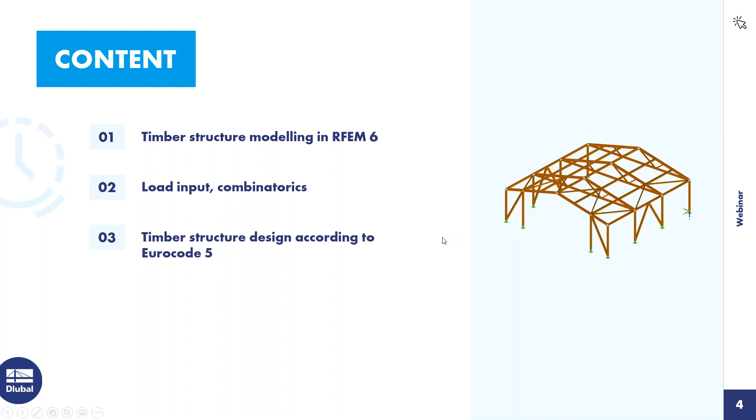You can email your questions to info@dlubal.com. To the agenda today: first point is timber structure modeling in RFEM 6, that will be done by Bastian. Then the second part, load input combinatorics. Then the timber design according to Eurocode 5, and he will document all in the printout report. Then he will hand over the screen to Gerhard and he shows two examples with detailed design, for example modal analysis. Then I hand over the screen to Bastian, just a moment.

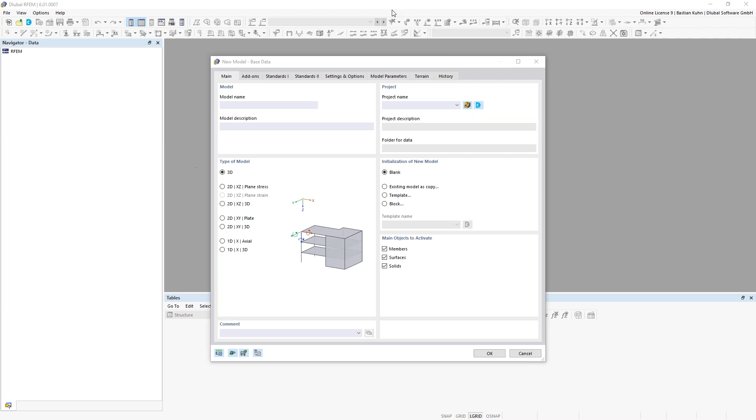All right, so when you start our new software RFEM 6, the program, we just give our model a name, we will call it webinar. Maybe also the date of today, that's 2021.

What's probably the first difference, if you know the RFEM 5 software, we have here the type of models, and there's a 3D model, what you probably all know and what we are dealing with today. But we also have increased the options for the 2D model, and there is this last one here for 2D, XZ, 3D, and also for XY, which means that you can model your structure 2D but design it in 3D. That is, I think, a good point for timber design, especially for timber design, because it's quite often used. That's what we know from our customers. But of course, today we will start with the 3D.

The other points I refer to the already-held webinars for RFEM 6 where this is explained. One of the other big changes compared to RFEM 5 is that we have included all the design add-ons directly into the software, and therefore you have to choose what kind of elements you want to design from the start. For my structure, what I will define here today, it's enough to have the combination wizard, the classification and load wizard, and also the timber design. All the other parts are not part of this webinar today. I think Gerhard will show you also a little bit about structure stability, but I will use the simplified method, which is included into the timber design as well.

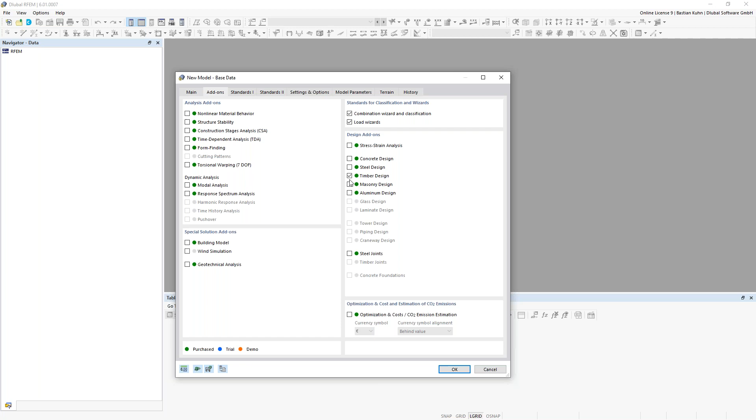Okay, now that I've chosen this add-on, I can directly go to standards and choose the Eurocode 5 here with the timber add-on.

When you choose the standard group timber, this button is active and you can edit the national annexes. For timber, the important point you should take a look at is the deformation coefficient, with which you regard creep into your structure for the serviceability limit design situation. It's divided into service class 1, 2, and 3.

For service class 2, it would be 0.8. For service class 3, it would be 2. As we are designing everything today in service class 1, we can choose 0.6 as a factor.

For the other factors, I will not lose too many words as they are not important. I will do the design according to the German annex for the Eurocode, but of course you have all the annexes for Eurocode listed here, and you can edit them however you want.

One point I forgot: of course, you do not only have to design according to the Eurocode. It's also possible according to the American standard, Canadian standard, Brazil, India, Switzerland, and so on. There are quite a lot of standards available.

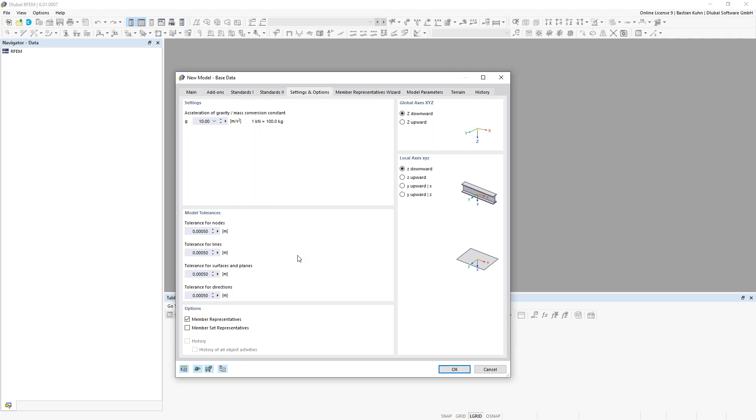When you activate this, another register opens up, and there you can see that you can consider member representatives. I will explain later directly in the software what this means for the practice in the design. Just to give a rough estimation now, you can unify several members into one representative, and the advantage is that you do not have to give design parameters to every member, but just to the representative. So that's a very short explanation of this.

Then the last register in the basics I want to show you is the model parameter, where you can select the location where you want to build your structure. So maybe we will give the explanation with the location of our office here in Leipzig, Neumarkt 1, and press OK.

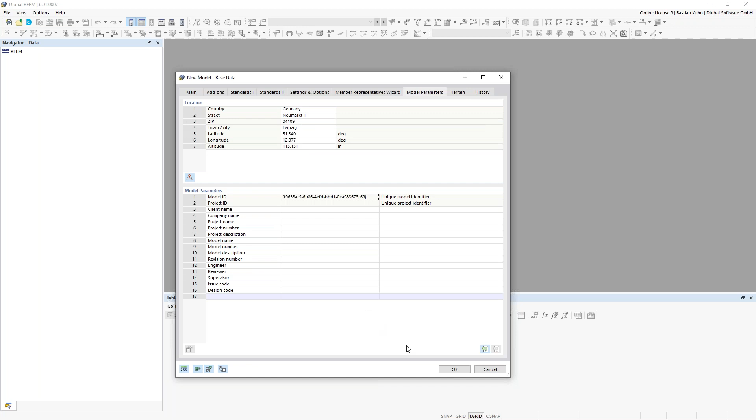Now we have the location, and one of the great advantages of this is that you do not have to take care about snow load, wind load, and earthquake design anymore, because all the relevant information given by the location is already inside the software via this. So that's quite a handy tool to have.

So now we are in the graphic screen of the structure. If you know RFEM 5, you will probably get a feeling for how this works. Right click here, there's the data navigator. We've changed a lot of things, but the view and how you work with it, I hope, is known to users who have been working with our software for a longer time.

Now we want to design a hall, and therefore we define a new member. We have here the member types. At first we will start with a beam member type, and as we want to define a column, we will give the end of it a hinge - here, a moment hinge at the end.

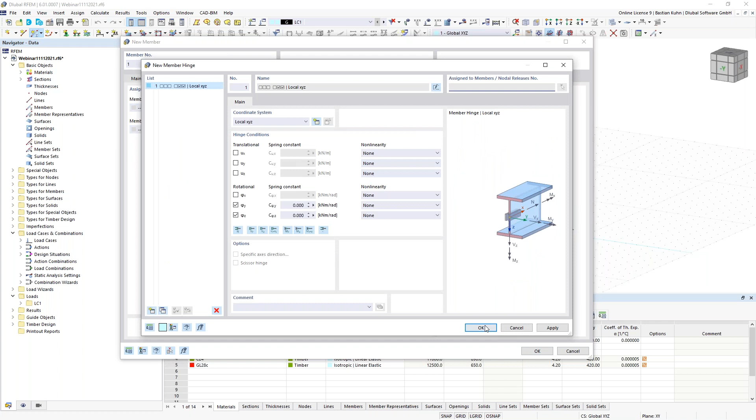Just simple like this. And now there's the second register, section with the distribution type, that has been increased quite a lot with the options you have there. You can design a tapered member, choose the alignment - that's much more user friendly than in RFEM 5, because the alignment and the eccentricity coming from it are calculated automatically. There are also several design types you can choose here.

Anyway, today in this part of the webinar we are concentrating on the uniform distribution type.

And we want to define the section. You see there's already a predefined section of 14 by 28 centimeters, but that's not what we want here, so we go to the library. The library is divided into steel sections on the left side - standardized and parametric sections - and on the right side you see all the sections relevant for concrete or massive design and for timber design.

We are able to design all the sections that you have here under parametric massive 1 in our add-on timber design.

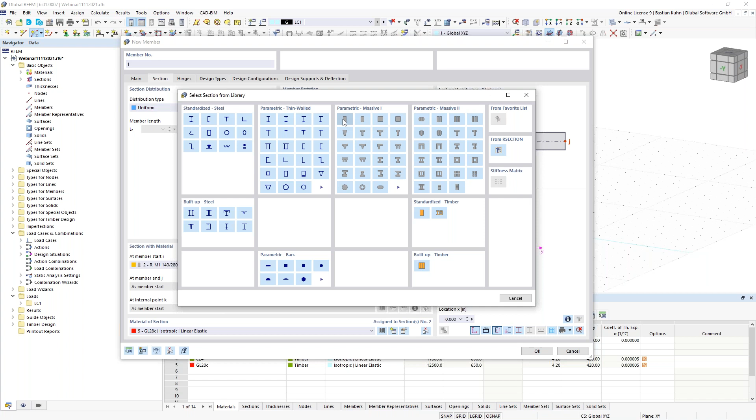Here you see that there's a whole bunch of sections possible, but today we will also concentrate on the massive rectangle sections. It's always opening on the other screen, and we now have the list of sections, and I want to actually have a section 14 by 14 centimeters.

I want to have it isotropic linear elastic from the material model, and if I click onto the library here, I get directly to the material library.

If you're working already with RFEM 5, you probably knew that the material database is maybe a little bit flooded or overloaded, and we really tried to clean that up here. So if you go to Europe, of course all the other countries are possible there as well. Solid timber, you see it's quite a cleaned up view, and not so many materials available anymore, as they were, from our opinion and also the customer's opinion, way too much in RFEM 5, and now it's much easier to get it.

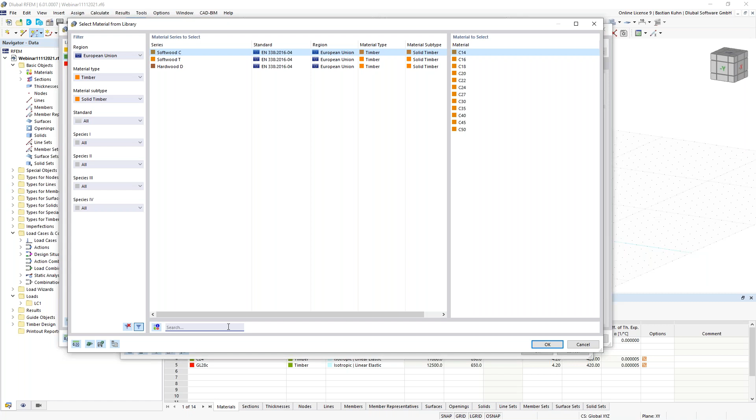But of course you can also use the search function here on the bottom. I'm using a C24 standard material for timber design, 14 by 14.

Sorry, I was a little bit too quick, I think, because when you choose C24 here, you have a register with the material values, and here in timber design you have all the relevant data you would need, the material properties, and also the design parameters for ultimate limit state, fire design, and so on. You can modify them here as well, so if you want to change the burning rate for whatever reason, it's possible to do it in here.

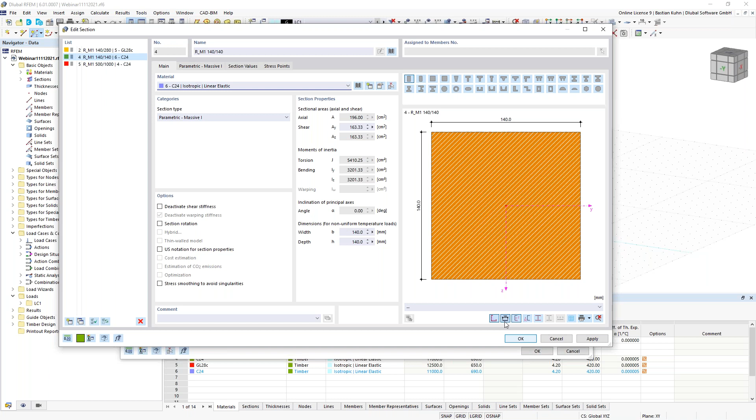Okay, yeah, this is the section. The other points are probably mentioned by Gerhard later on. Okay, and this was the wrong section, I wanted to have the 14 by 14 centimeters.

Okay, these are the first three registers, main, section, and hinges, what I showed you now. And there are also 3 more registers: design types and design configuration. That is one of the big changes in RFEM 6, that now you are defining all the design parameters according to member. It has the great advantage that you can change the design parameters for different members, e.g. a column may have another design parameter than a girder or anything else. But I want to model my structure first, and then I will show you these dialogues and also explain what it does, and also explain the member representatives with this.

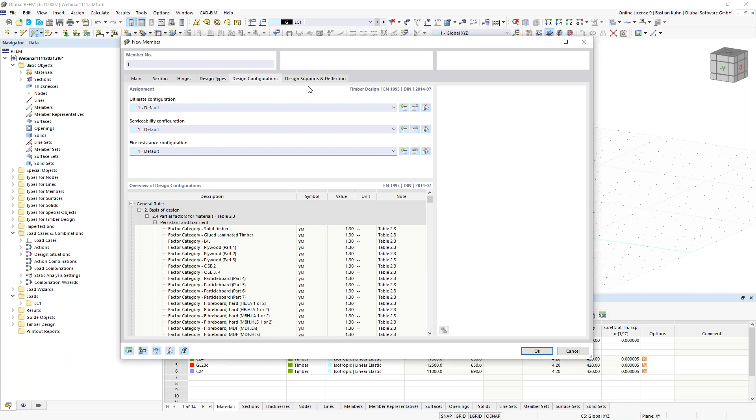So this is now just for your information, and I will model the structure. So the first column will start at its origin and should have a length of 4 meters. You see that if you open this drop-down box here, the representative is already assigned, and it has this little box which shows me that this is a representative.

Then I will give it a support. Now that's a little bit too small, if you want to increase the size a little bit you can do it here. Oh, that's still not that good, I think. Okay, but yeah, maybe we also shouldn't overdo it.

Okay, that is this, and then we will copy that 14 meters... created one copy in X direction, 14 meters. Okay, and there it is.

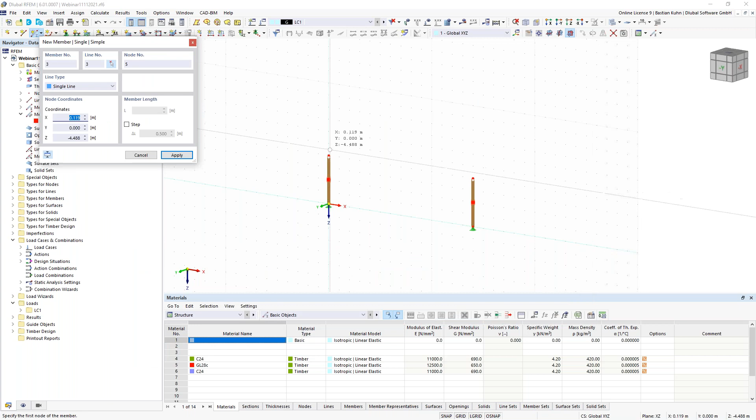And then we will have one of the other girders, and this should have another section here. Actually, I want to have this section, it suits me good, it's 14 by 28 centimeters, and also GL28C is the right material for me. Define it here, and then divide this member by 1 node.

Okay, so we see now that you have 2 member representatives here, and that the column and the girder are already divided by that. So we want to have a roof angle of 13 degrees, that gives me some height kind of this. And here probably one edge I also want to have a hinge, and therefore I'm defining it there as well.

So now we need the bottom girder of the little truss that we are designing, and that will also be, in this case, I'm using a truss type, because all the other elements that I have should actually not be loaded by bending, so I can use the truss type here.

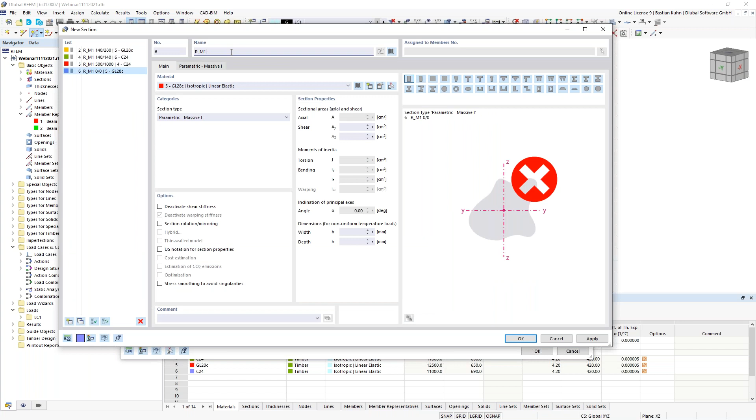And as a section, I have to define a new one, and this will be, let me look, 14 centimeters by 26 centimeters. And of course, in this size, I'm also using GL28C.

Yeah, okay, the other points I will mention later on, and define this here. So, now I have the third representative in here. This member here, I'm now also dividing.

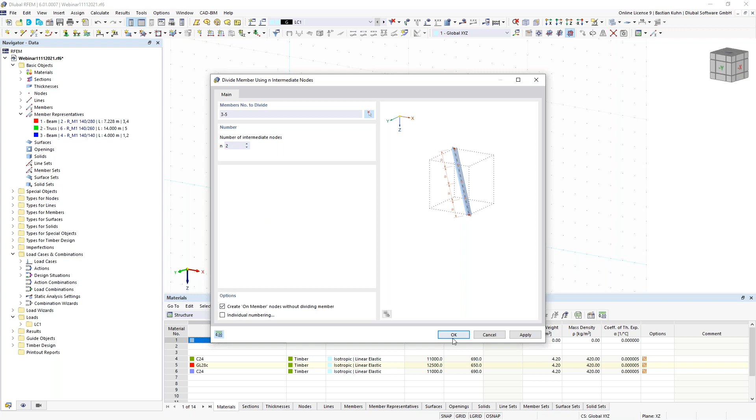By intermediate nodes, but there is a good new feature that we have here. On the bottom under options, you have the option to create member nodes without dividing the member. So if I choose now 2 intermediate nodes and press OK, you see the beam still has its original length.

Of 14 meters, but I have here intermediate nodes that are not dividing my structure. This is also one of the advantages in RFEM 6 compared to RFEM 5, that we do not have to divide the members so often, and then the options with sets of members are maybe not really needed so often. They are still probably needed for serviceability limit design and so on, but not as often as we had it in RFEM 5.

Okay, now I will define the intermediate sections or members. They can also be a truss type. Actually, now everything I'm doing is defining truss types. Define a new section here, and that should be 120 by 120. And then of course I can use the C24. I choose this material here, say okay, okay, okay, and define it here.

One way this, and now it's probably very obvious what the representative does, because now it's clear that left and right side are similar, and you see that they are unified here under this representative. Okay, one more time, and now it should be ready.

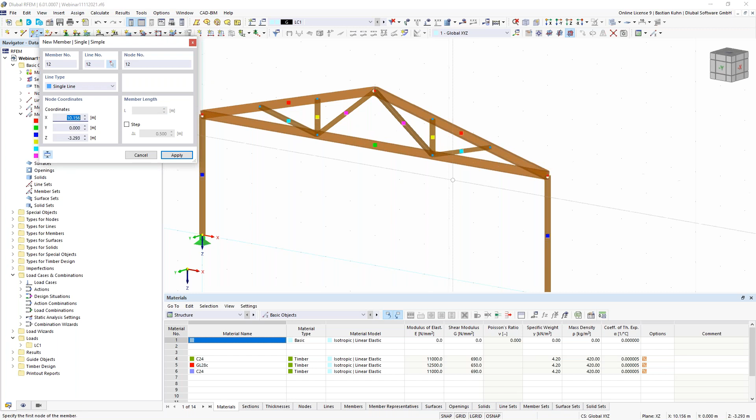Yes, that works. This structure I can now maybe load for the self-weight and the roof setup in the first load case, because it's quite simple here. The first load case is already assigned, so I choose here 2 kilonewton per meter. Load direction ZL is fine to me. Say here or here, okay. And now I have it there.

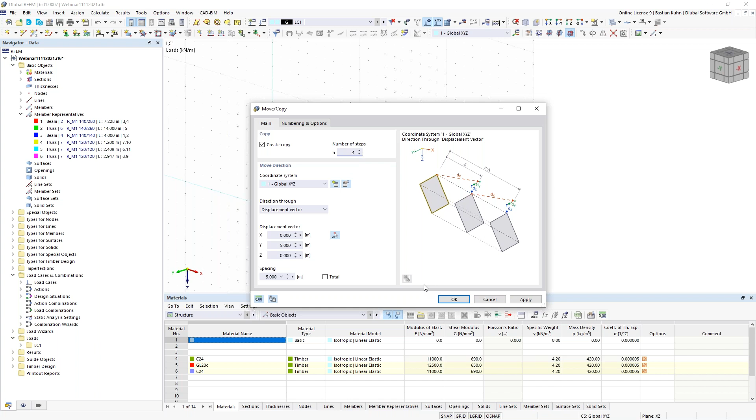Now the last thing I need to do for my hall is to copy this again, but now in Y direction, not for four times, but for 5 meters in Y direction, and here 4 times. Now if you activate under numbering and options the link steps, you can also directly connect all the related parts to each other.

Therefore, we will also define another member. This can also be a truss type, and the section probably it's enough to do 12 by 12, but maybe just to be sure we take 14 by 14. It's okay, 14 by 14, C24 can stay, so that's okay, and okay again.

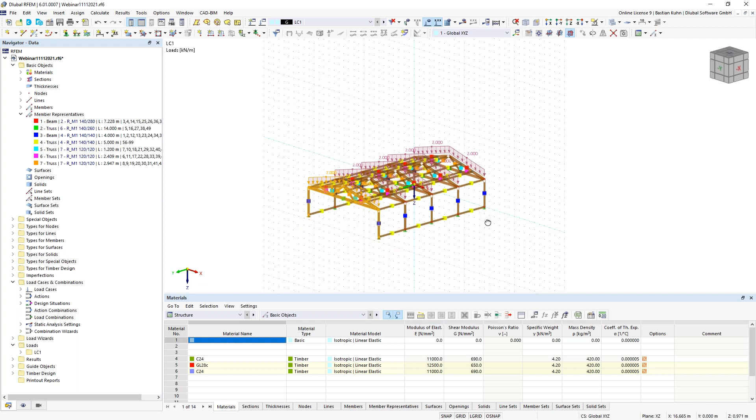And now we have it. Also the load is here. Now the beams on the bottom probably make not so much sense, so I'm switching off the member representative, and now I can just simply delete the one at the bottom. If I go into the other direction, also the one right here, I will also delete. I can delete the lines actually, because this deletes the members as well.

Lines and delete. All right. Perfect, so that looks quite good to me. That's a truss. Okay, now I know I forgot one thing: the load here on the side should be the half of the one that we have in the middle of the field. So that is easy, because 2 divided by 2 is 1.

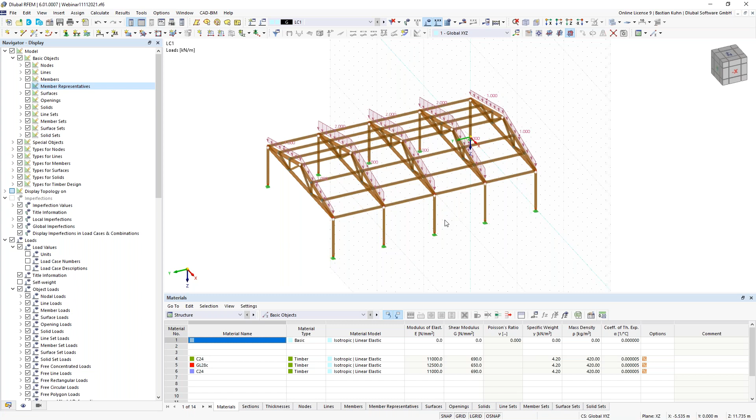And now we have it right here, and this hall is now still kinematic, pretty obvious to everybody. Now we need to define there also stiffening elements. I choose to define my stiffening elements near the middle of the structure, because it makes the most sense to me. Once again, divide the member by 1 node and without dividing the member, and define the section there.

And I'm once again choosing the truss and the section 14 by 14. Okay. Here as well. And here. So now the walls are stiffened out into the Y direction.

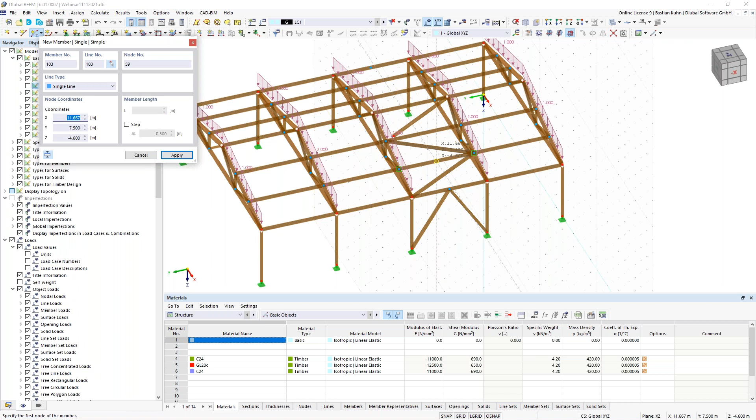I will do the same for the roof. So come on, this and this, and this and this. Oh, that was wrong, I saw it already. Okay, I'll get out of the dialog and grab it here and move it to this node. Maybe switch on the representatives just to see it again, and for me it's a good help to have it.

I will just do one side of the structure, and I also will stiffen out the front of it.

I will delete this here, because I want a complete fixed wall inside. Now we cannot have the representative, that makes no sense. So we do it this way instead, copy it here, and then we have it. And if we fix that to the bottom, it's there. And here, once again, the last cross section.

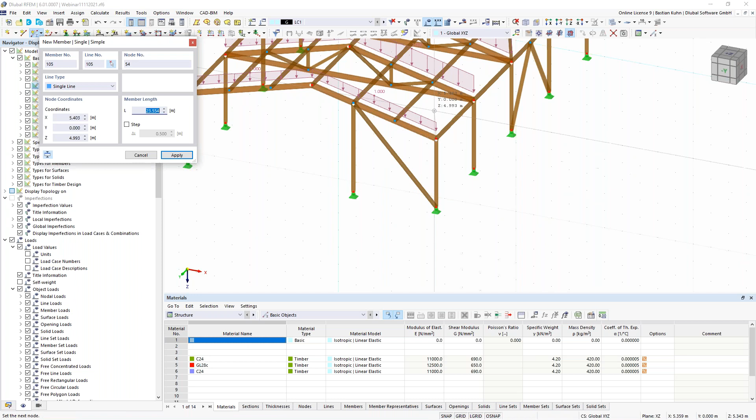14, okay. And for my roof, I will also give some stiffening elements right here, here, and here. Okay, quite a lot of drag and drop or modeling, but I promise that's it.

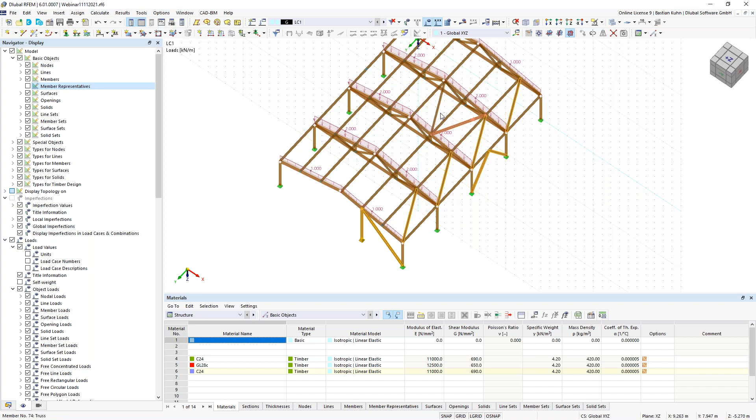So then we copy, or we mirror it to the other side. This, and this, and now we mirror it, we create a copy, and we use the YZ plane and copy it directly at the ridge. All right, so now it's there.

We can make a little test and save it directly in this folder before we run the loading for snow and wind. That's what's missing already, but that looks quite good. And so we have a load, and 9.7 millimeter deformation looks also quite reasonable.

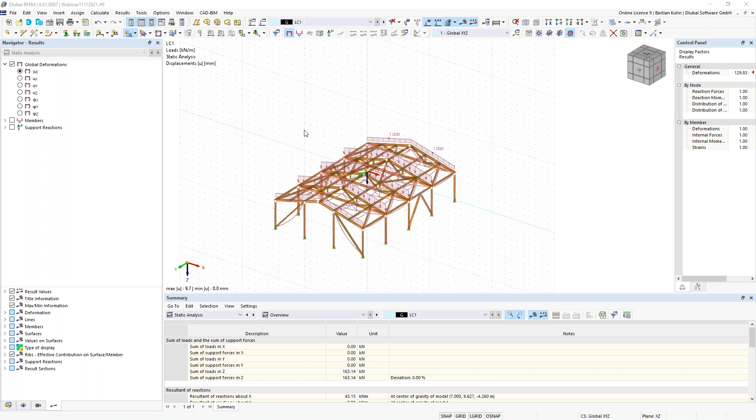Now one of the other great features we have in RFEM 6 compared to RFEM 5 is the so-called surface type load transfer. So when you define a new surface here, press OK and define it, I will explain the register right away. Even though it does delete the result, you do not have to worry. This surface type only distributes loads. It does nothing else, it gives no stiffness to your structure or anything. So it's only distributing the load into its plane area to the edges. That's what I want to achieve here.

Now I want to explain the register. If you double click onto the surface again and go to load transfer, you have an option to say remove influence parallel to members. In this case I only want to distribute the load, similar to what I did with the self weight, to the main member or main beam here. So we will use this one and this one, and this one — actually I was probably on the other side, but I think it shouldn't matter, just to be sure I will use them again. Okay, and yeah, I was on the other side.

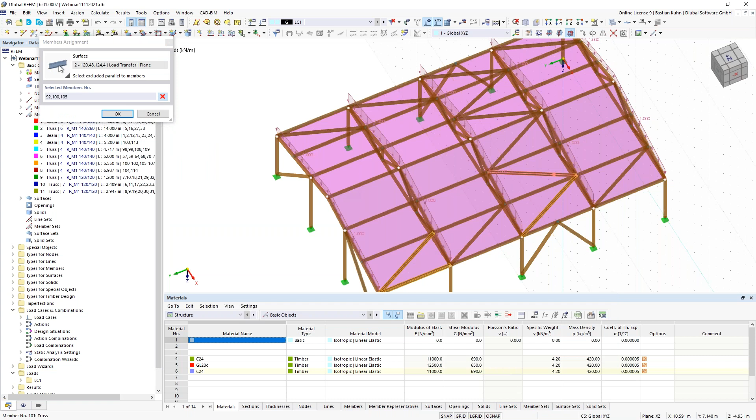But then I can do it here similarly and select it here, here, and here. Press OK, and now I have defined the distribution, and I want to show you in the snow load generator what kind of effect this has.

I already said that if you know RFEM 5, the work is quite similar to RFEM 6, but one thing that's been increased enormously in options is the columns here on the bottom. That's what I want to show you here.

The load wizard is now also integrated into the column. If I go to snow load in here and double click, I can choose the dual pitch roof, then choose the nodes of the roof. You can choose the roof side, and the parameters you can control.

You see it's already assigned all the relevant parameters: the height, where my building is located, the load zone, and so on. The load cases I need to define for this webinar today — I'll just show the load case full snow load, not the half snow load on the left and half snow load on the right side. I think that's enough, and for this kind of structure we're defining here, I think any engineer designing a structure with a dual pitch roof will mainly use this, or it's mostly the design-giving roof.

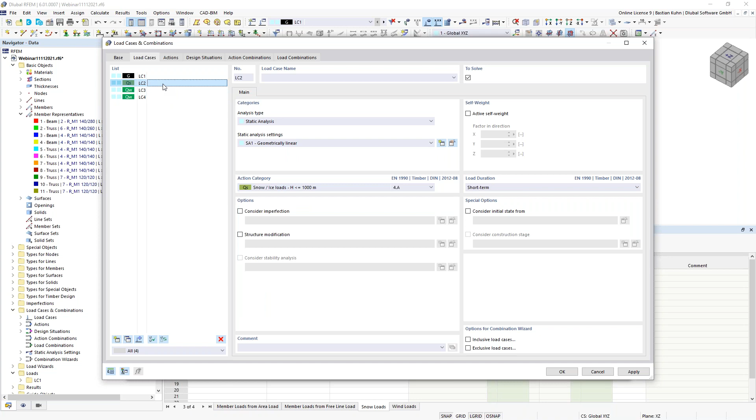I will define 3 load cases more: one for the snow load we're using right now, and 2 more for the wind loads, since we want to define them as well. So now it's choosing load case 2, and if we select OK and jump to load case 2, we see the envelope of the load generated here.

And if we go to surfaces and display load separately, you can see that because of my load distribution surface that I have defined, the load is correctly transferred to the main girders of the structure.

Okay, one more time we do the same for the wind load. There we will just choose the dual pitch roof with the roof corners. Here, select the points once again.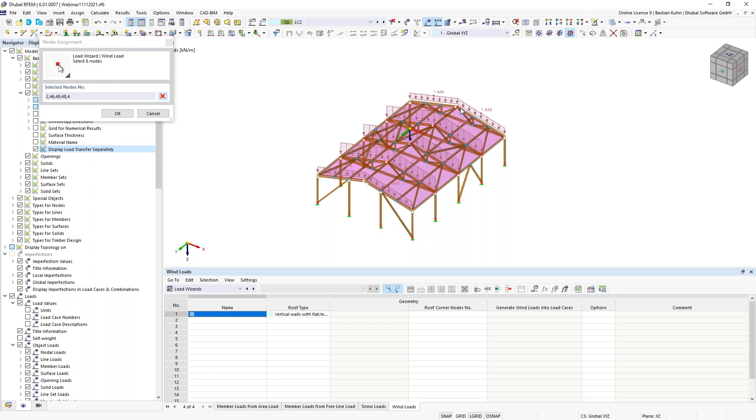No, there and there. I would just define 2 directions: 0 degree and 90 degree. I hope that's right. Yeah, I think so. Here I have to define my structure height, which is 5.8 meters.

All the other parameters are taken over from the first input. For the webinar, I will just use the uplifting wind loads and not the wind pressure loads. So, now when we look at this,

here at load case 3, that looks quite good, I think. And in load case 4 as well, maybe we should also display that separately just to check it, but it looks reasonable to me. And here you can see the wind load zones as well.

Okay, so the structure is done, and now we will concentrate on the modeling, or on the load combination. Sorry, that was a little bit too quick. Here you can define what kind of load cases and combinations you want to assign and calculate.

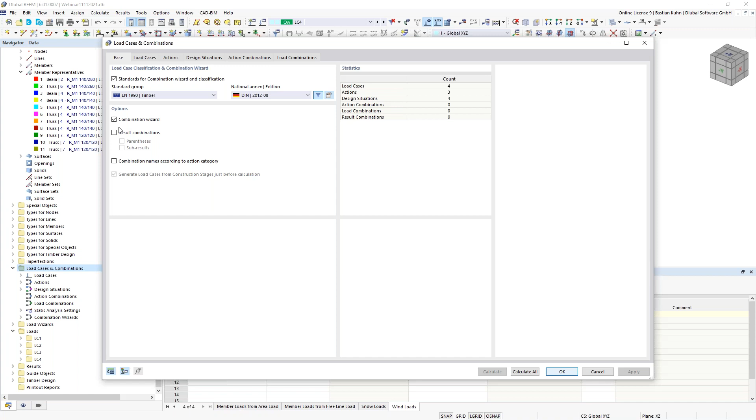I have the combination wizard activated in case you want to make your own definitions of load combinations. You just have to deactivate that. For our purposes here, we will use it.

The design situation we want to verify is ultimate limit state and 3 types for serviceability limit state. And I also want to do fire resistance verification. For this, I will define an accidental combination.

Here in the info box, you can always see what the software is doing with it. So you see here the creeping factor that I introduced at the start in the basic data, where it is located and where it is used in the software.

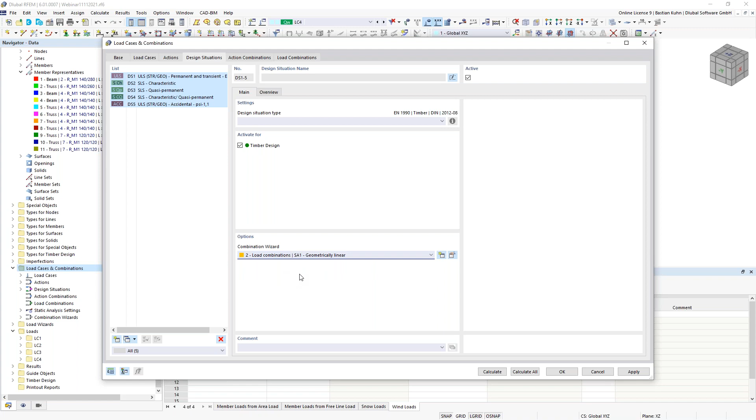I already checked if a design according to second order theory is necessary. It is not, and therefore I can say the load combination can be generated geometrically linear.

Okay, so now that's done, but I forgot one thing—or not forgot, but I mentioned it—that we need to define the design parameters before we are designing the structure. And now we have the representatives here.

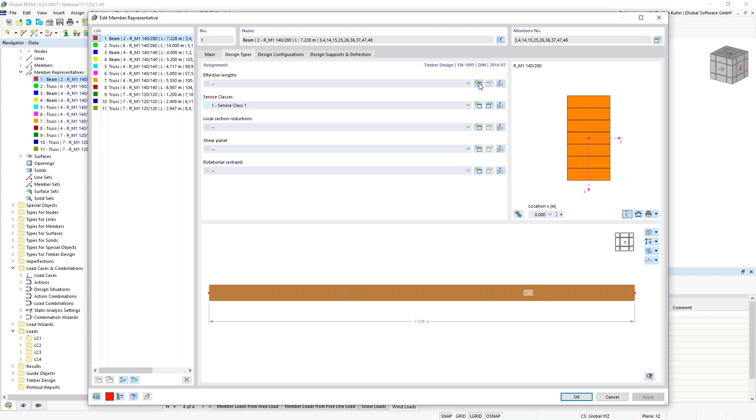So, the first representative we can activate is for the top girder. That's probably the representative we need to look at the most regarding stability problematics. And if you go here to design types, effective lengths, you can consider the effective lengths for buckling

and for lateral torsional buckling. We are also able to verify such elements via an eigenvalue method, but this is going to be shown by Gerhard in just a few minutes when I finish my side of the presentation.

And yeah, therefore I will just concentrate on buckling and lateral torsional buckling with the equivalent member method. That's what I'm doing here. And I'm actually switching to absolute values because I know the hall has a width of 14 meters, and half of it is 7 meters.

So I say for the strong axis, I can use this one, and for buckling in the weak axis and lateral torsional buckling, I can choose the distances of my stiffening elements that I defined, which are at a value of 2.58 meters.

Say, okay, service class is 1, that's okay. Local section reductions, in case you have any kind of plumbing or electricity cutting your structure, you can also define it here and decrease the strength of it.

A shear panel and a rotational restraint are more or less mainly for the eigenvalue method that is going to be shown to you by Gerhard.

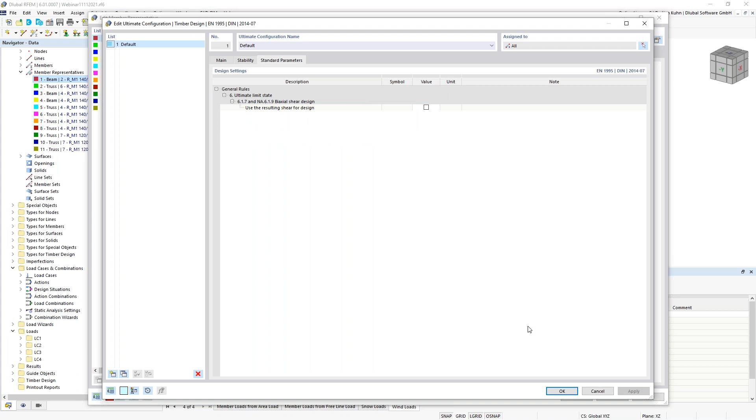but this is not relevant now for us. And the shear design is, I think, also not relevant in this case. Okay, serviceability for the top girder is not relevant because when I'm verifying the deformation in the bottom girder, it's more than enough, so I can switch that off.

And fire resistance as well. I will get to that point when I take a look at the other elements. And that's right now, because the bottom girder is probably exposed to fire, and I want to expose it to fire by a ratio of 30 minutes. So 3 sides of the structure are exposed to fire, and that's enough for me.

Serviceability is also relevant for the bottom girder. Of course, that's the most important information for this bottom girder, I think, how much it is deforming. The limit values you can edit here. That's similar to what you can do in RFEM 5.

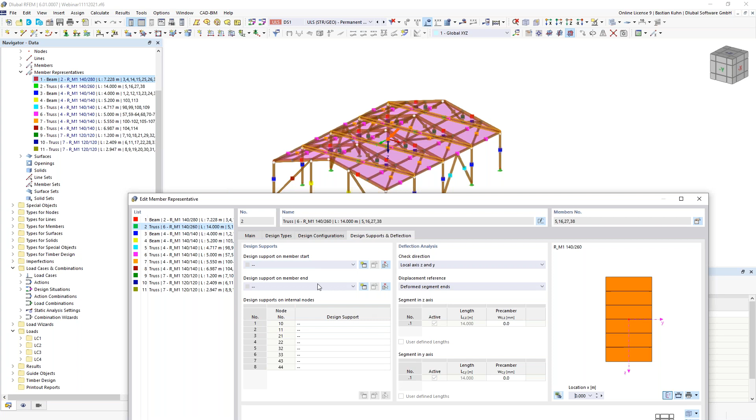And design supports and deflection, I will also leave the default values. But here you can say if you want to have design supports in it, and also say for the deflection analysis in which direction you want to assign that. I think it's also going to be shown by Gerhard to you later on.

Buckling, of course, also for the bottom girder, this is probably relevant, but maybe not. Well, we could also do it for lateral torsional buckling, but as the load is introduced at the top of the top girder, it's maybe not so relevant in here.

And here as well, also for the buckling, we can try to design a little bit more efficiently and say it's held in the weaker axis by the stiffening elements, and for the other direction I can choose the whole length of the beam, which is of course 14 meters.

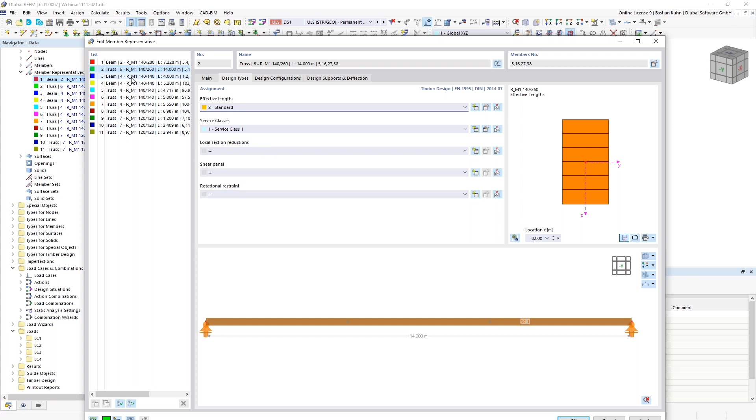So I have this here, service class there as well. All the other elements that I have in here are all just stiffening elements. I can actually select them all and say for effective lengths, okay, I'm just verifying buckling, because mainly I'm actually looking for the columns in here, and I will also leave the principal axis by a factor of 1.

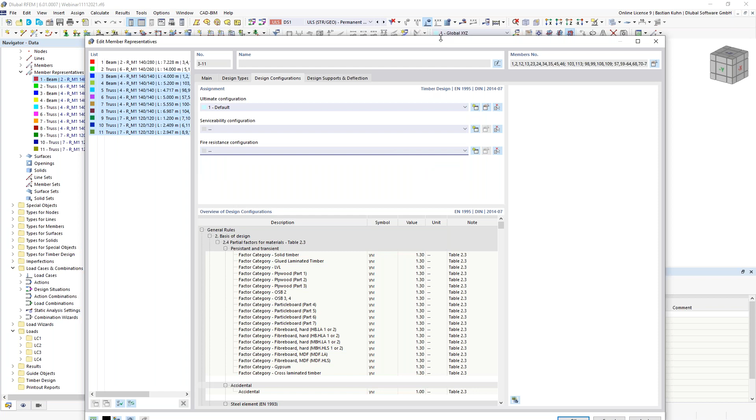Design configurations, I want to have ultimate limit state. Of course, serviceability makes absolutely no sense for the other elements. Fire resistance, yeah, of course, for the columns that would make sense, but for all other elements not, so I'm skipping it for this presentation. Press OK, and now my input is actually ready.

I can directly design the structure, and for this you go to the columns again, to the timber design, where the former add-on Timber Pro is included. And here you can say, choose what you want to design.

Of course, I have my ultimate limit state, serviceability, and also the fire resistance combination, and I want to verify them all. I can check what kind of objects I want to design in this structure, all material configurations and so on.

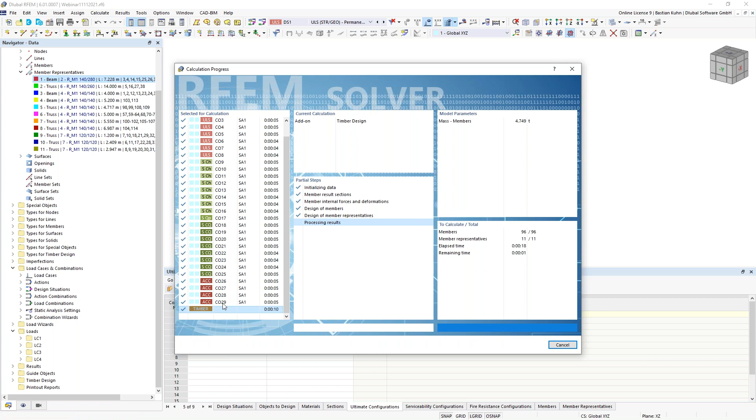Now when you start the calculation, one thing I wanted to show you is that with RFEM 6 we have the option to parallelize the whole combination. So each combination—if you look at RFEM 5, the calculation was done so combination 1 was calculated, then combination 2, and so on—here all 29 combinations are done at the same time. So the speed up process for a lot of combinations should be quite good or big.

So you see here, hooray, we have a loading of 100%. Every engineer loves to see this, I think. Well, 100% is still red, but I think 100% is a good value to have. That's what we can see here in the overview, and here in the design ratios on members you see that we have this loading here.

And here again, the representatives are a good tool to check the calculations that you did. So when you activate the top girder and say, okay, please show me only the selected objects, I can now take a look at the top girder. And of course, design governing for this, as we all expected probably, is the stability analysis with lateral torsional buckling according to 6.3.3 in Eurocode 5.

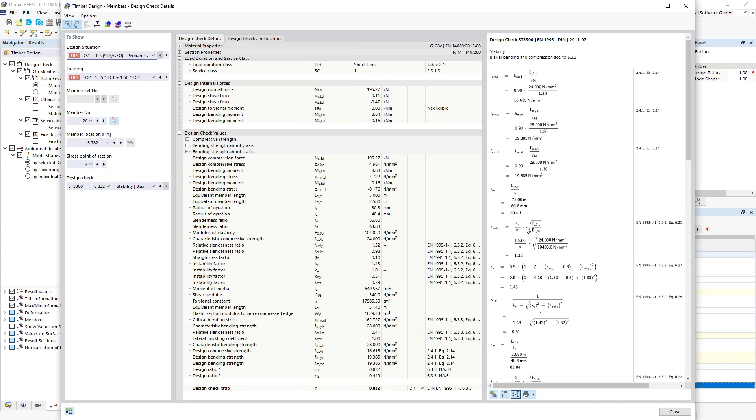And if you go to the detail mask in here, you can look at the design check details, and you have all the values written as a very nice equation related also to the equations from the standard, so you can directly vice versa look into the standard and verify all these points. This is probably something you want to have in your printout report, so there we are directly printing it to this.

I will not show you the whole printout report again, because I only want to show the parts relevant for timber design. Maybe I don't want all points in it, but global settings, design situation, materials, yeah, we can have them. Sections and ultimate limit configurations make not so much sense, I'll show that in the protocol directly. Fire resistance makes sense with the settings, and in the results I'll probably just have the design ratio by design situation and by section, but only verifications over 60%. Everything else doesn't make much sense to me.

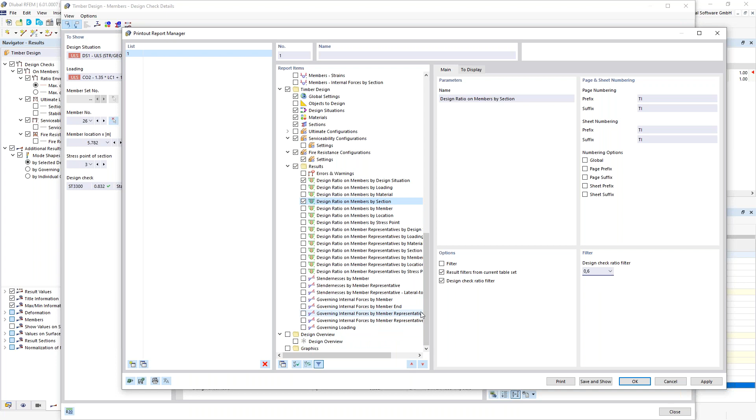So then I say okay, and on the other screen it shows that the printout was successfully generated, which is good.

Here you have all the results and verifications into your structure, and design ratio by section is probably something quite interesting. If we go for the representative again and switch that on, you see it here. So buckling is still a problem for the bottom girder, or well, it's design-governing. And for the columns, you see there's potential to save a little wood and money by decreasing the size. But you also need to look at the connections, so 70% isn't bad to have there.

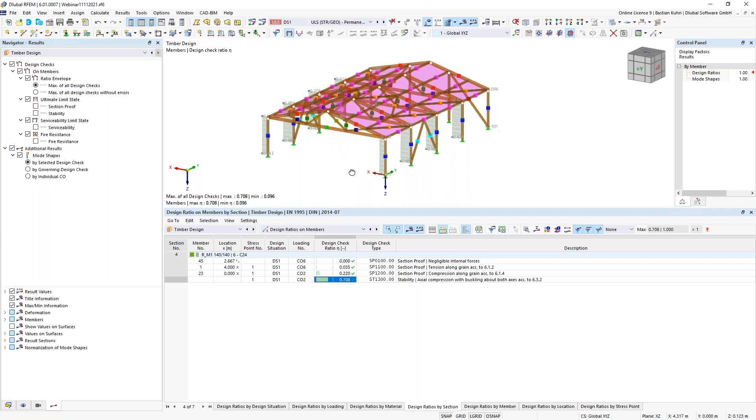A picture like this, for example, maybe isn't the nicest. Well, why not? If you want to look at the columns, let's say no, we'll do it the other way. Hold on.

This is representative, so then we make selected and related objects. This is maybe something good to have in the printout report, or in the results we use the static analysis result, and maybe also the internal forces for normal forces, which is quite interesting.

This design situation is the envelope of all the combinations for ultimate limit state that I have here, similar to the result combination we had in RFEM 5. So I print that to the protocol and open it directly with this.

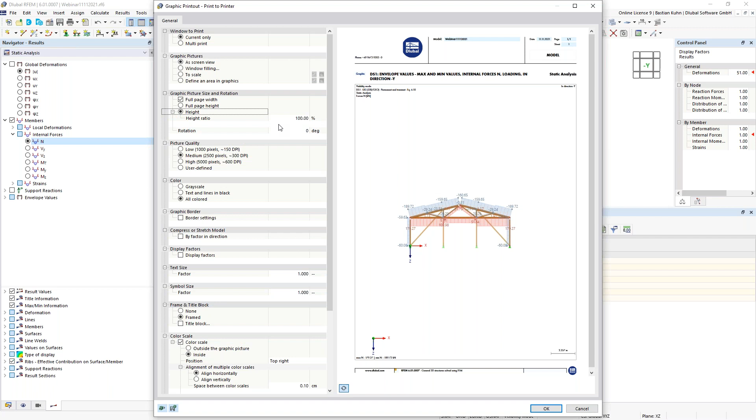Yeah, maybe not the full height, and then I'll directly hand over to Gerhard. For height, let's say, I don't know, we take 50%. Actually, we should have left it this way. Okay, anyway, we print it there.

Oh no, sorry, that was my fault, I did not open the protocol but printed it directly. Okay, sorry, but I can open it now right here. I think it's also opening on the other screen. Yeah, that's for sure. Oh no, there it is. Sorry. Okay, then you have the printout report here with the content.

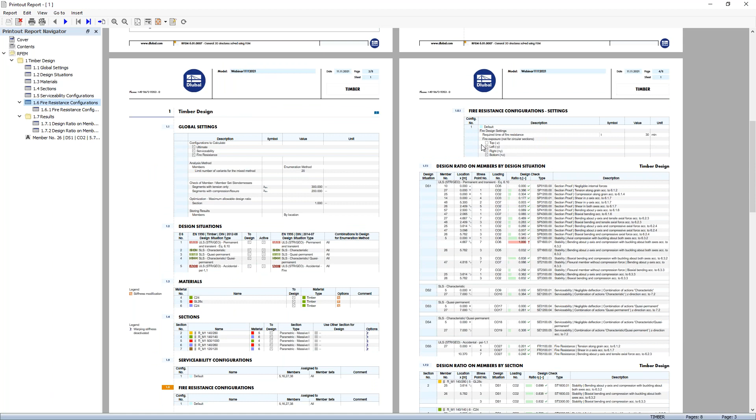You see there's a new fresh style in it, with a lot of options possible. Long-standing wishes are included here, unifying PDFs, including other PDFs, other documents, and so on. That's all possible. Related to the timber points, here you have the verification I mentioned, the design ratios, and the configurations for fire resistance, including that it's exposed on 3 sides and so on. So that's all included here.

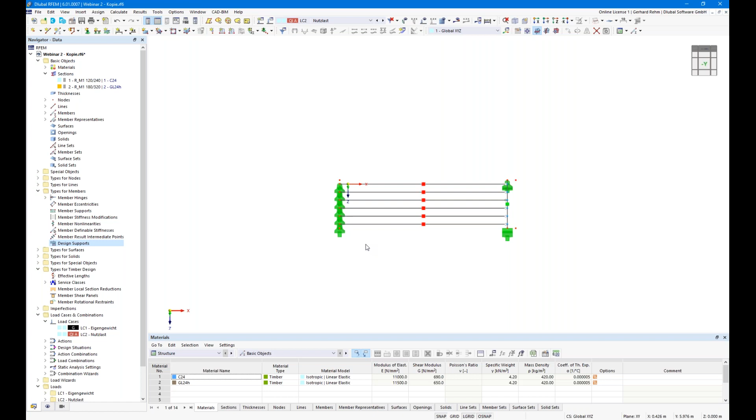So I have 2 examples to show you a few new features in RFEM 6 related to timber design. The first is a topic missing in RFEM 5, and in RFEM 6 we're proud to offer this feature. It's about compression design, when stresses are perpendicular to the grain, which was always missing in RFEM 5, and it's an important feature. We've started implementing it, and it's finished for general cases, but in more complex structures, for example when a lot of beams meet at one node, it's quite tricky, and we need to find a solution to know where the beam is supported and where the bearing area is.

But I'll show you this feature on this floor. It's a floor with a few beams supported on a downstand beam, so there is no rigid support here along this downstand beam, of course, so we have a semi-rigid support for these beams. Okay, so let's start with the beams.

I will show you how to do it. So here on top you will find this tab, Design Supports and Deflection. This tab controls the design supports and also the deflection checks.

We know about Timber Pro, for example, in RFEM 5. There you had to manually define this reference length for the deflection check. And this is done here in this right column.

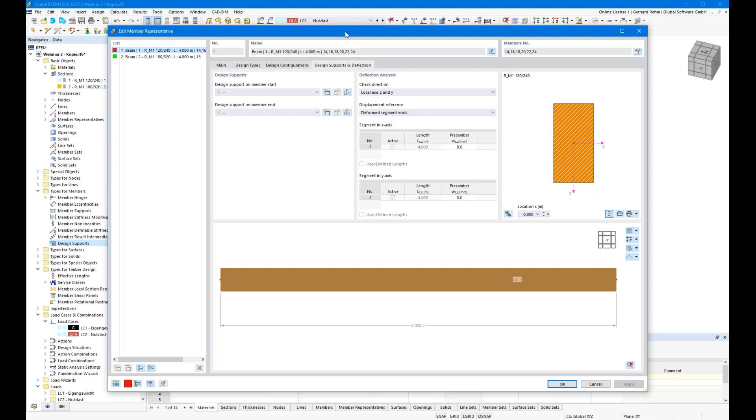So let's start with the design supports. First you can think about why is it related to a member and not to a support. Of course a lot of people expect that this compression design is related to supports, but we have situations where a member end is not supported on a support, but on another beam, for example.

And therefore it's a property of the member and not of the support. So we have member start, member end, or member set start, member set end, and here we can define this support. So we create new, and here we will find the settings for timber.

So we have, of course, in contact area, which we need to define. We say it's a direct support, and the support length, for example, in this case, it's 60 millimeters. It's supported on the positive side, so on the plus z axis. It's an edge support and not an inner support. And this KC 90 factor, which is mentioned in the Eurocode, needs to be entered here.

So we use 1.5 for C24 in this example. Let's name it directly by C24 and 60 millimeter. Then on the right side, we create another one, so it's C24-2 and the beam is 180 millimeter. I will switch this to 180 millimeters and to 1.52.

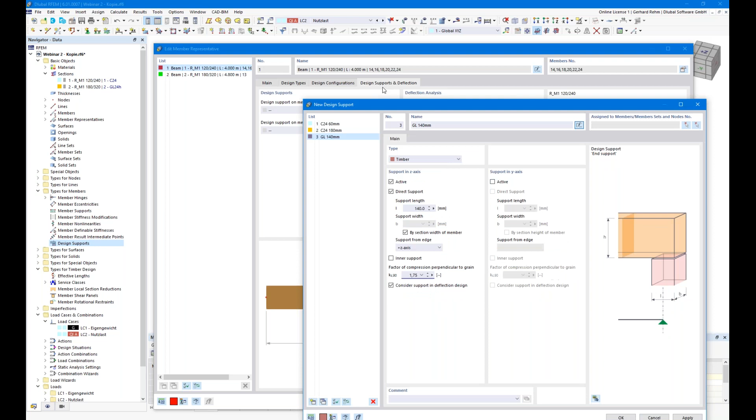And of course the beams are supported on top side, therefore we need another one. In this case it's 140 millimeters, and it's on the minus z axis. It's an inner support, and factor is 1.75.

So I assign the support number 1 on the left side of the beams and support number 2 on the right side of the beams. When you watch this, you see the edge is missing because we are always relating to the statical axis. In case you really want to have it, I can show you afterwards by members how to extend this graphically if needed.

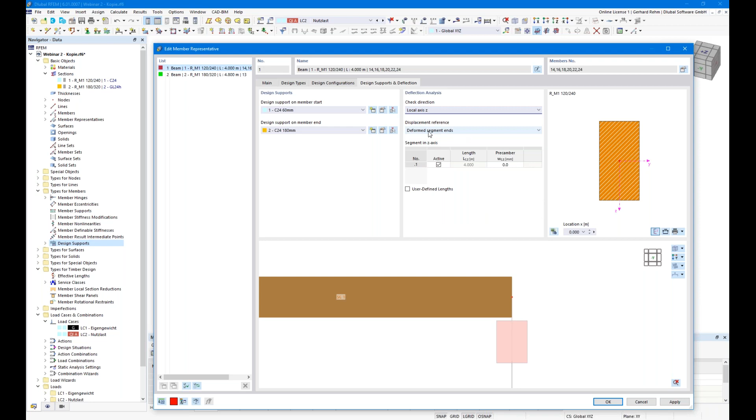To be honest, I don't need it, but maybe for some graphical output you can extend it to the end of this design support. Okay, so that's it actually. The deflection check should be in z direction and to the deformed segment ends, so we consider also the deformation of this downstand beam here. And that's it actually for the beams.

All right, and now let's go to the downstand beam here, to the glulam beam. We go here to this tab again, design supports and deflection. So here you see on the left side, I have this support number 3 with 140 millimeters.

Let's go back to this topic to extend the member. So here on the main tab, there is a new option called end modifications, and for these end modifications you can extend these members graphically only. So it has no influence on the stiffness, on loads and so on, it's just graphically.

This is possible, but I will switch it off, I don't need it. Now let's check this one. We have these intermediate nodes, and of course the load comes from top, so we need to check the support pressure also from top side.

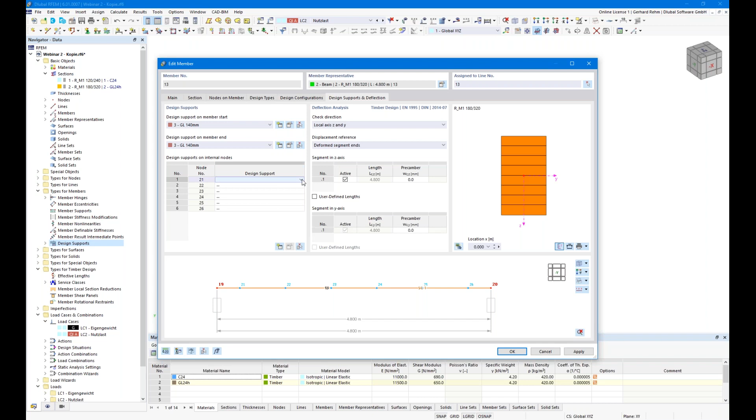So I will assign number 4 for the top, and I hit the F8 button to overtake the column or the cell from above. We check z direction again, and as you can see here, we have a lot of segments now because of this.

That means the deflection check would now check the deformation between these nodes. Of course, this is not the wished behavior - I want to check from node 19 to 20. In this case, just go back to this design support and deactivate this option: consider support in deflection design.

When you do this, you will realize we get one segment again. So in case you have no real support, for example an indirect support like a dovetail connection or some other steel connection, you can simply leave it empty here, or deactivate this option, direct support, and then there is no compression design check. You see, when I deactivate it, all this information is not necessary.

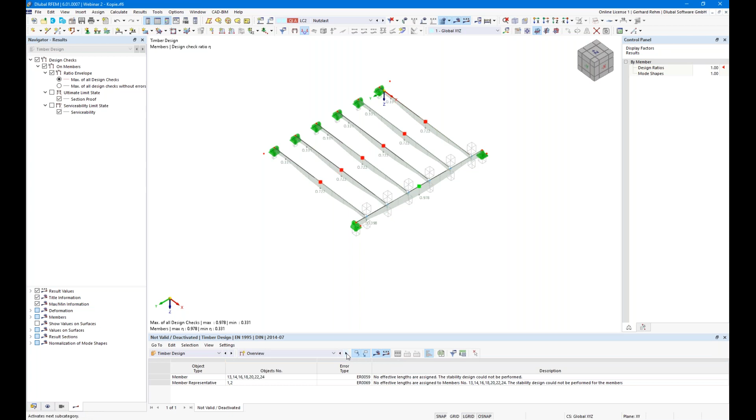All right, so that's it so far. Let's go to the results. We see a ratio here close to 100%. There are a few warning messages because I have not assigned any effective lengths, but I don't care about that - stability is not controlling here. I just check my stuff per member representatives, and go to this tab here.

Then we see the results of the beams on top and of the glulam beam. There are a lot of SLS design checks, so I'm not interested in all of this, therefore I say please show me only the governing serviceability check. Then it reduces all the lines to 4: the check for support pressure, shear, bending, and serviceability. This reduces everything a lot.

Okay, let's check one of them, the compression perpendicular to the grain check. What's happening? Of course we get our support forces - it's 10.5 kilonewton. We calculate this effective area. In this case we have 60 millimeters, and we can add this 30 millimeters because of the effect where the grains hook in. And if the member is not really 30 millimeters long, then this is checked also.

In this case it's 60 plus 30 millimeters equals 90 millimeters, and the width of the beam is 120 millimeters, giving us this effective area. The KC90 factor is considered - actually it's not a big deal, but the problem was always in RFEM 5 that we had no support width, and that was the reason it was always missing.

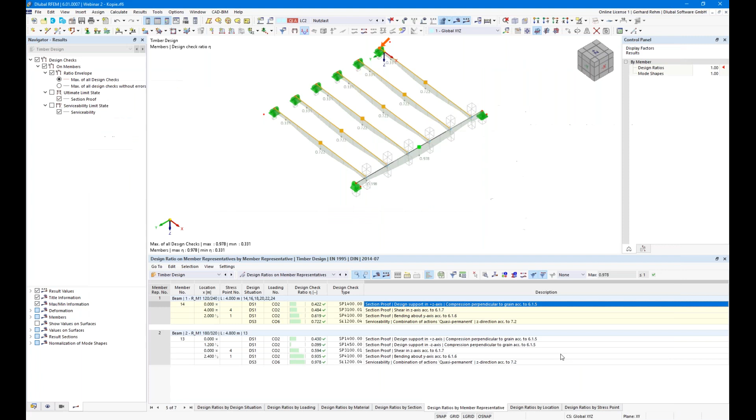Okay, so this was this part, and let's also check only the serviceability. We see the ratio is affine to the deformation, and that's actually what I expect. Okay, so far to this feature, and then let's go to the another one.

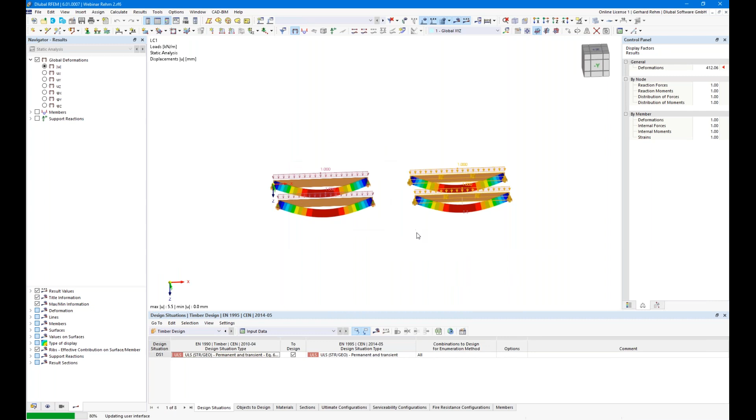Seems it was the wrong one now, but it does not matter - I can just go back to the state where I want to start. I delete this and this. Okay, and I will remove all effective lengths, and then we can directly start.

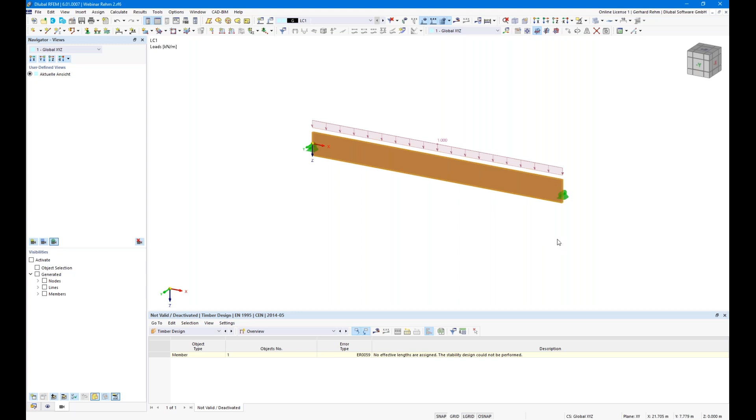Okay, so what do we have here? We have just a simple one span beam, supported on both sides. We have a load on top, and let's check the length - it's 18 meters, and the cross section is 14 centimeters by 160 centimeters. Because of this situation, the beam is forced to buckle out of the plane due to lateral torsional buckling, and this of course we need to check.

I have run the analysis again already, and you see this error message again: no effective lengths are assigned, the stability design could not be performed. This behavior was changed in RFEM 6, because in RFEM 5 there was always a default effective length with a factor of 1.0 multiplied by the member or member set lengths. In that case there was always the problem that a lot of users didn't assign any factor or the correct factor. Now, whenever there's no effective length, you get this warning message that you forgot to assign any effective lengths. That's the reason we get only shear and bending design and no stability design.

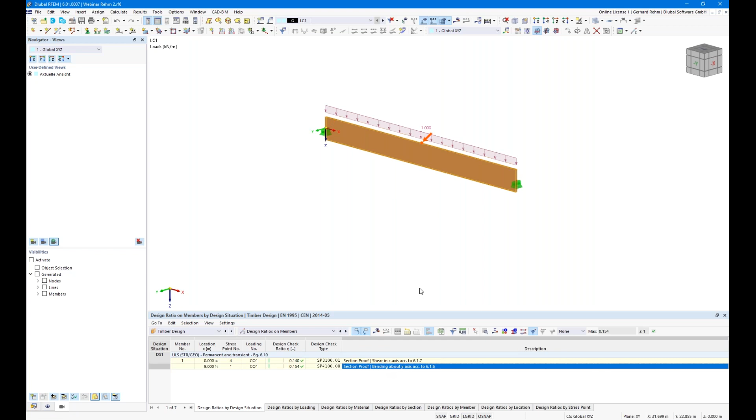Okay, then let's define an effective length for this one span beam. We can deactivate flexural buckling since I have no normal force in the beam. Let's go to this factor here on the bottom - this is the factor where we have to modify our effective lengths.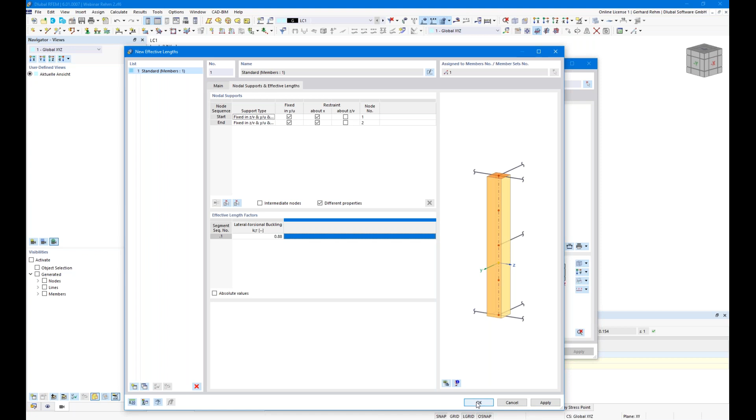According to Eurocode 5, the factor for this parabolic moment distribution is 0.9. There is a more exact approach in the German annex, and the factor here is 0.885. I show you this factor now and not the 0.9 because the result is more close to the eigenvalue result that I'll show you afterwards.

Okay, so let's do this. Click OK, and you see already directly that this design support, or this support for the effective length, is also considered here in the main model. You can activate it or deactivate it. It depends on you.

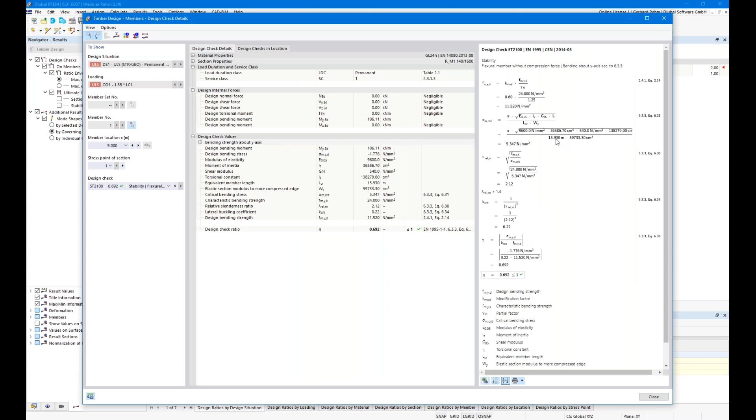Okay, let's run the analysis. We see we get a ratio, compared to the cross-section check, from 15% to nearly 70%. So what we can see is the critical stress, which is determined by the effective length. It was 0.885 multiplied by this 18 meters, equals 15.93 meters, and we get this critical stress here.

So when we divide this critical stress, 5.347, divided by our current stress, 1.776, we get a critical or load factor of 3.01. So maybe we can remember this factor, 301.

And this is the typical solution that you would use in RFEM 5 or by hand calculation. But the question is always what happens in case of more complex structures, more complex supports, maybe intermediate supports, supports on top flange, bottom flange, and so on, curved beams, tapered beams, and so on. I will show you our second solution for this issue.

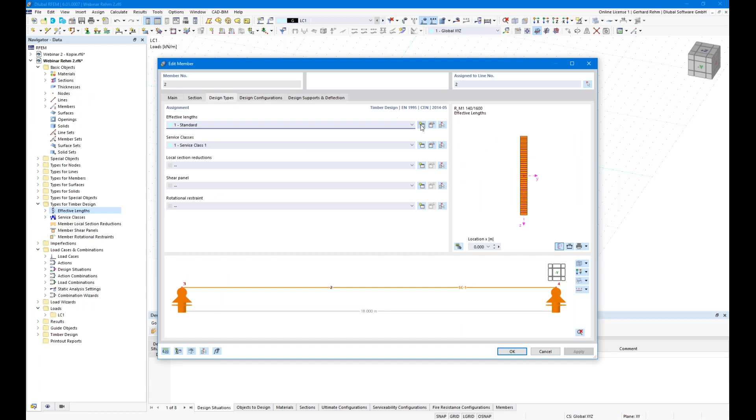So I will create a copy, and for the second one, I will use our eigenvalue solver. This eigenvalue solver was already part of the EC3 add-on module in RFEM 5, and is also, of course, available in RFEM 6 for steel constructions, and now available also for timber constructions. So in this case, I will switch to the eigenvalue method.

In this tab, I have to define the supports, so the effective length factors are not important for now since I use the eigenvalue method. Here you can see the preview of how the beam is supported, and in this case the default setting is already correct. We have a fork support on both sides, so fixed in Y and about X direction, and that's actually all I need.

So I just hit the button OK, that's it, click OK, and now let's compare both results.

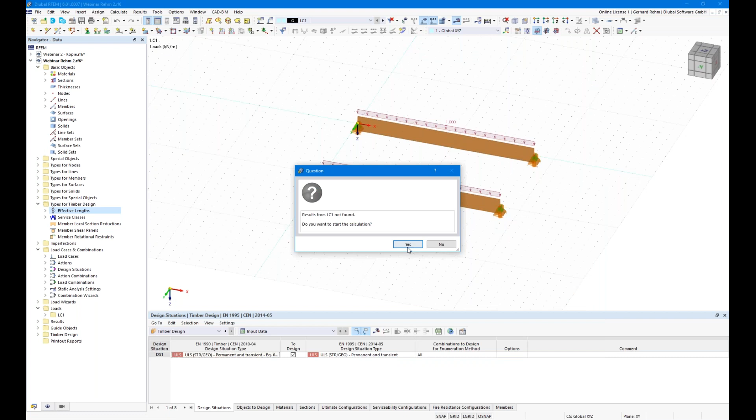I forgot one thing to mention, and it's about the load position. The load position can be defined here in the ULS config of a member, or of the timber design. So I set it to shear center to compare the results and get the same values in both methods. That's why I set it to shear center, because with the other solution, keeping the downwards option here, the results vary a bit more. So that's why I've set it to shear center, but we will switch it later.

Okay, so let's compare the results. The ratio with the eigenvalue is 68.3 and 69.2, so the results are actually the same.

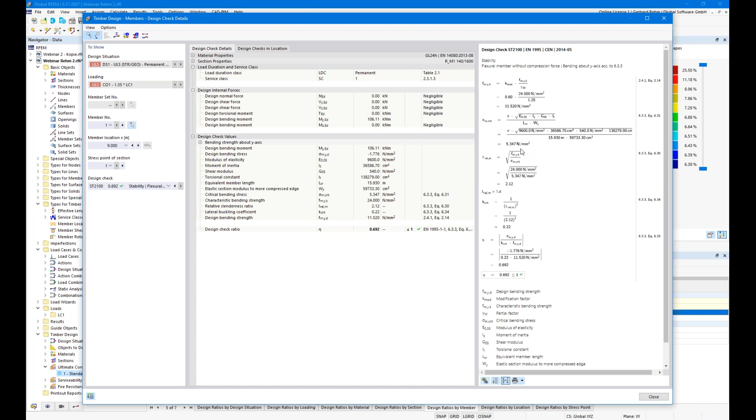So let's go to the equivalent member design with an analytical way to determine the stress. Here the critical load factor was 301, and when we switch to member number 2, our eigenvalue solver gives us this factor of 305, which fits perfectly with this analytical solution. That's why, of course, the ratios are the same in both cases.

So our eigenvalue solver is fed by the stiffness and so on as support conditions, and the result is this critical load factor. When we multiply our bending moment with the critical load factor, we get our critical moment, and divide by the elastic section modulus, we get our critical stress. Okay, so this is one example.

We can extend it to show you the advantages of it. I will divide these members here. It seems my shortcuts were deleted while I installed the new version, but that's actually not too bad, because I can show you another feature in RFEM 6, a new one: all commands here for the toolbars can be assigned to a shortcut.

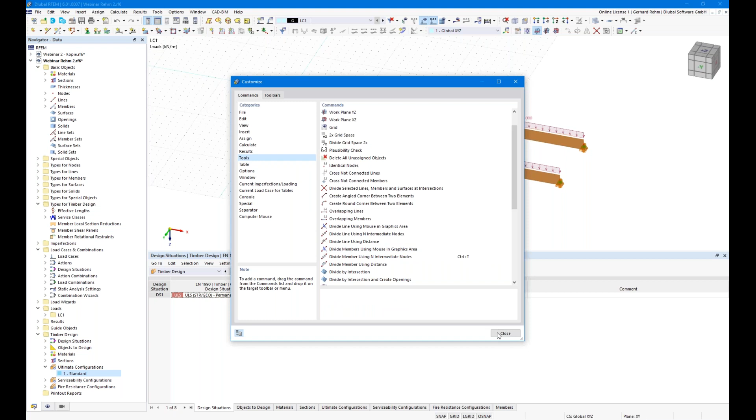So in this case, I go to Tools and select divide the member using N intermediate nodes. I assign a shortcut, Control T for example, and set it. I select both members, Control T, and this dialog directly pops up.

Two intermediate nodes, and I don't want to divide the member, I just want to have the nodes on the member. Okay, so let's switch this. What I want to do is support the beam at the third points.

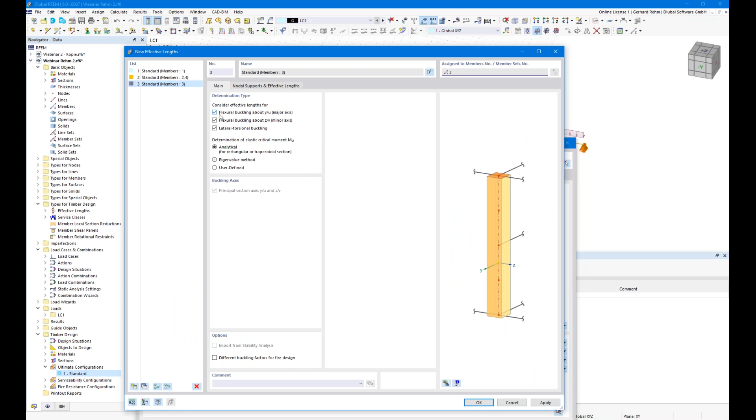So I'll do this by defining a new effective length with analytical solution. With the analytical solution we assume the bending moment is parabolic, but in between these two nodes the distribution is nearly constant, and when it's constant the factor is 1.0 according to Eurocode tables. It's an assumption, but it's actually a good assumption, and it's common to use it in practice.

But of course when we switch over to absolute values, it's still considering the 18 meters and not the 6 meters, and we can deal with this by adding intermediate nodes. We have these two intermediate nodes, so I just hit this beam. Oh sorry, that was the wrong one, I guess.

Yes, select member, and then we get these two intermediate nodes. The big advantage now in RFEM 5, when you had 100 members, you had to define the effective length for each of the 100 members. Here I can assign an effective length to all members that I've selected, so this is directly a property which can be controlled for these members, and it's a big advantage.

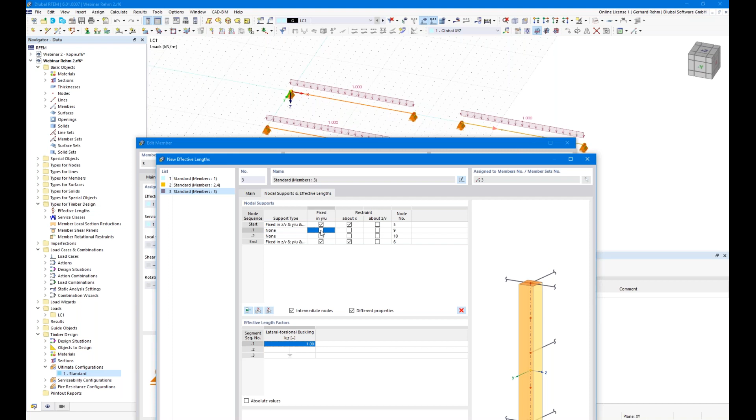So in this case, I say here there is a fixed support in Y direction, so out of plane, and that's it actually. And here I get my 6 meters.

And you see directly these supports, and we do the same for the eigenvalue method. In Y direction you can activate the default or the preview, and then you see directly where the supports are. Okay, so that's all for now.

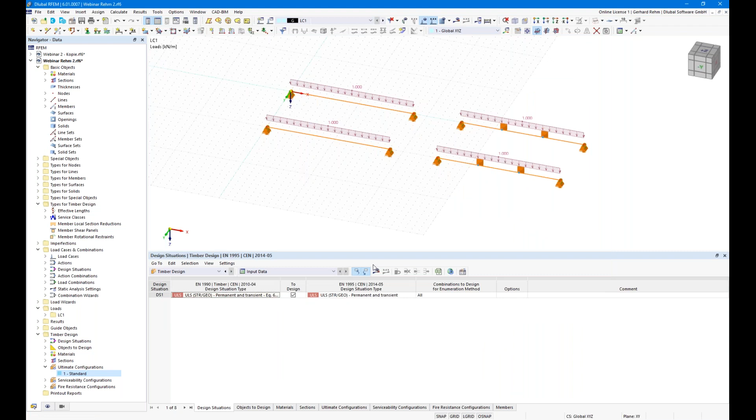Just click OK and run the analysis again, and then we can check the results. Of course, the ratio needs to be, or must be, smaller now than the ratio from the left side. So the ratio goes down to 26 by the analytical solution, and here with the eigenvalue method.

The difference is a bit more now compared to the left side, of course, because this assumption that there's a constant moment distribution is, of course, not completely true, since it's not really constant. And that's, of course, why there's a difference.

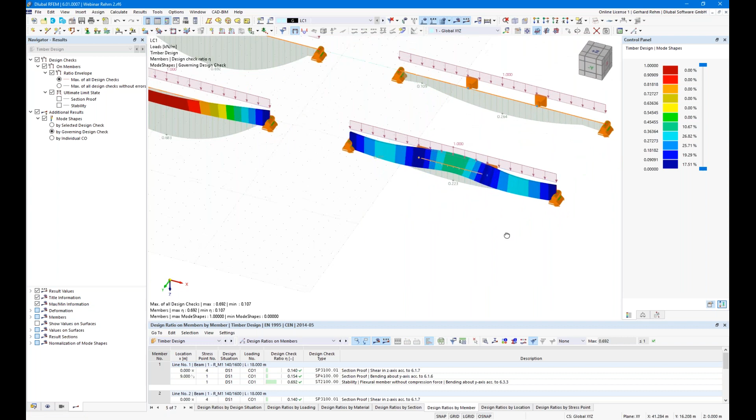The big advantage with this eigenvalue solver is that you see directly if your supports are correct, because we can show or display this mode shape. Here, of course, we have a big sinus wave because we have no lateral restraints. And here on this side, you see it considers the nodes or the support, and we can go a bit further here.

For example, we also have the possibility to assign this support at the upper side of the flanges. Okay, so when we click OK, we will directly see it's also moved in the graphics and also in RFEM, so we can directly control actually where the supports are located.

So we had 22 or 23 of ratio here, and of course when the beam is supported on the top side, the ratio should go lower. Maybe not much, but at least a bit. Okay, yeah, it goes down to 20%. Let's double check again.

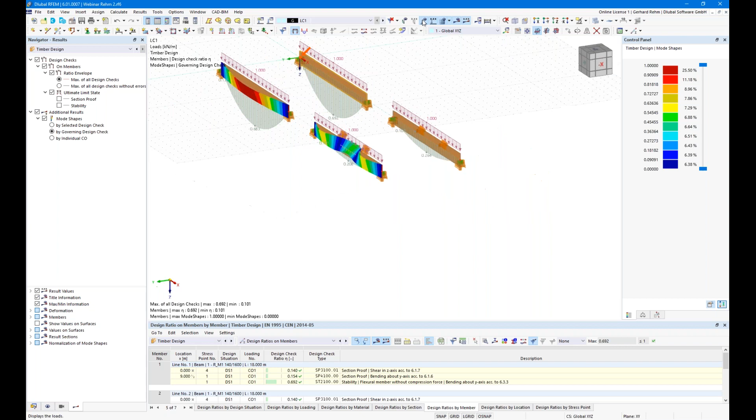You can see here that it's a perfect support on the top side, but the bottom side, of course, is able to move out of the plane.